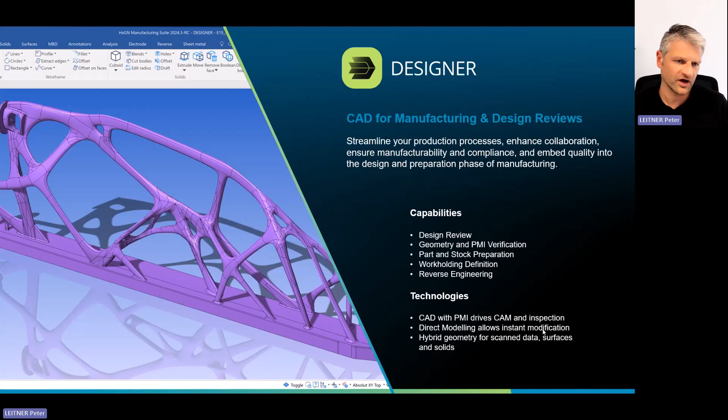And in detail, I want to go into the Hexagon Additive Manufacturing Suite, which consists of 4 software products: Designer, where we want to deep dive today, AM Studio, Simufact Additive, and Esprit Edge. Designer is CAD for manufacturing and design review, so you can make design reviews, you can generate geometries, or you can design in Designer. And parts and stocks can be prepared for workholding definitions, and so on. And the underlying technology is a direct modeler, which allows instant modifying of a certain geometry. I want to go into that in detail later on.

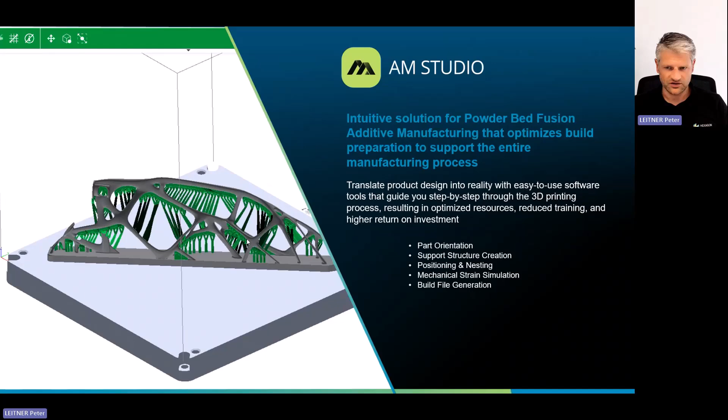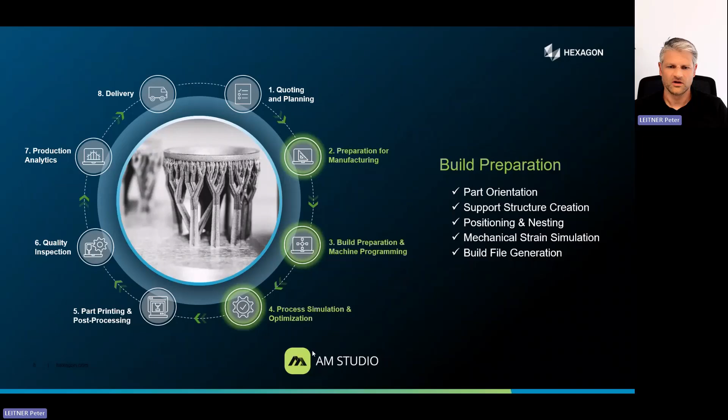If we look at the circle from quote to delivery, Designer is placed at the beginning of the circle or the workflow. It's in quotation and planning, as well as in preparation for manufacturing. Next product is AM Studio, which is more or less the data preparation tool for metal additive manufacturing. In AM Studio, you are able to orientate the part. You can define the support structures, the positioning and nesting of parts. You can run a quick mechanical strain analysis or simulation. And last but not least, you can generate a build file for the 3D printer. AM Studio is in the circle of quote to delivery also at the beginning, from step 2 to step 4. Before the printing of the part, all the steps are done in AM Studio.

The third product in the Additive Manufacturing Suite is Simufact Additive, a powerful and scalable process simulation for first-time right metal additive manufacturing. You have fast meshing capabilities, and you can predict the distortions of the part in an early stage before printing. You can optimize based upon this distortion prediction. Simufact Additive is in the circle again in the data preparation area and in the process simulation and optimization steps.

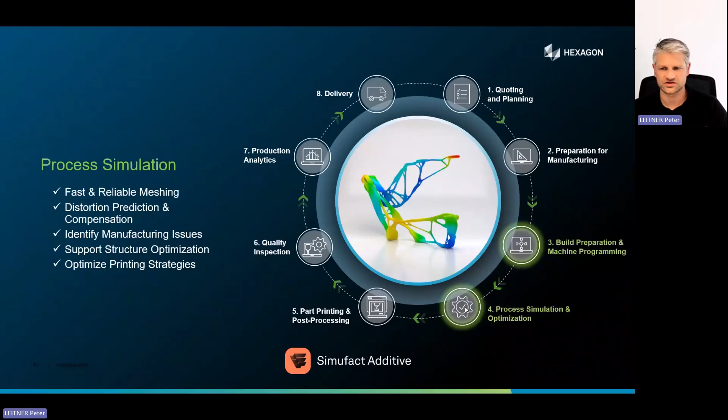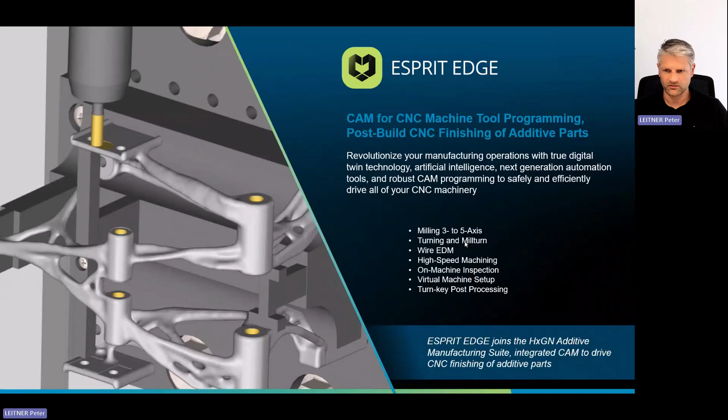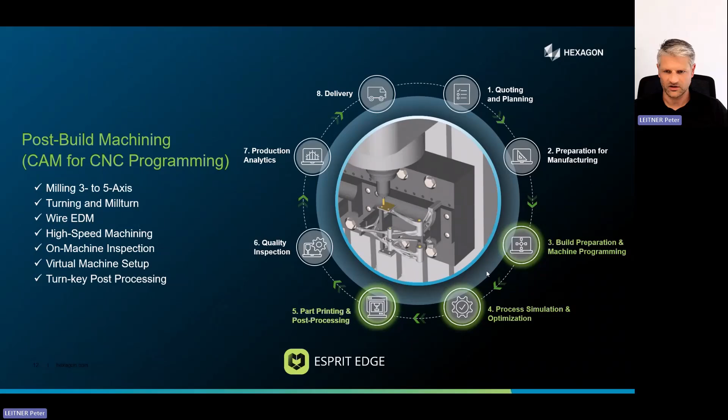And last but not least, we have to post-process nearly every part, or we CNC finish the additive parts in Esprit Edge. It's a CAM software for CNC milling for 3 to 5 axis, turning and mill turn, and a bunch of other functionalities. And Esprit Edge, or the CAM, is found in the printing and post-processing. All these products can interoperate within Nexus, which is a platform to share projects with the different software products, so that automatization and collaboration of all these products is guaranteed.

Okay, so I started Designer. And the default for users is the default theme, where you have all the functionalities available which Designer can offer. And in the next version of Designer, the 2024.4 version, a theme called Additive Theme or AM Studio Theme will be available, where we made a subset of all the functionalities that Designer can offer in its own theme, where you can find the most common functions which are necessary in the additive world.

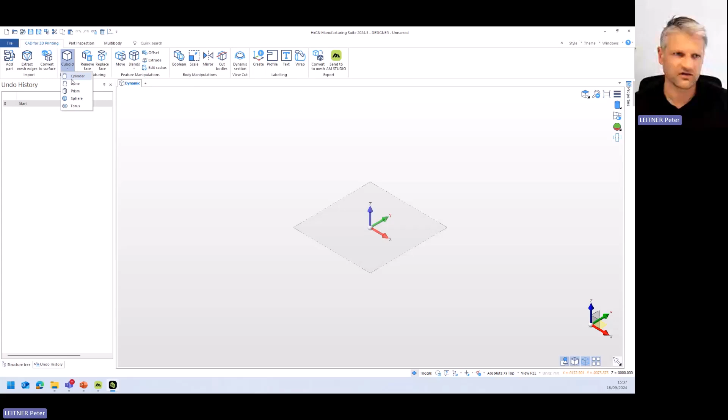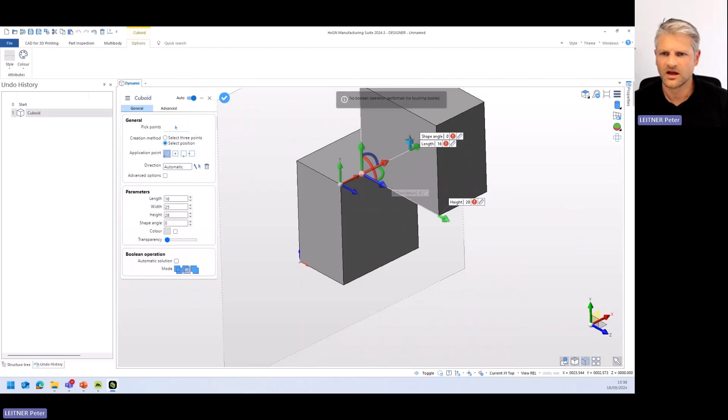Designer, as I mentioned before, is in general a direct modeler. What does direct modeling mean? Direct modeling allows you to quickly shape geometries without worrying about features or constraints. What I mean with that is, for example, I want to design here a simple cube structure, something like that. And what I mean with direct modeling is you can now change the topology of the part pretty easily by simply, oh, that's the wrong one, sorry.

You can change the part pretty easily by simply dragging and dropping some features, and you get a new topology or a new design out of it, but it still remains as one body. It's still the body that is here. It's similar to shaping a dough by pushing and pulling features. And this is what I wanted to mention here.

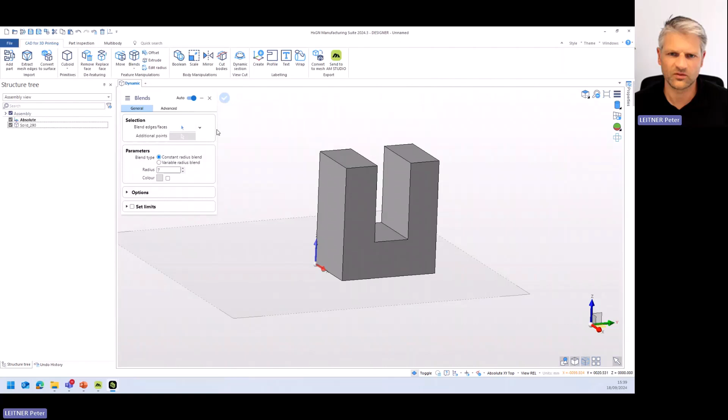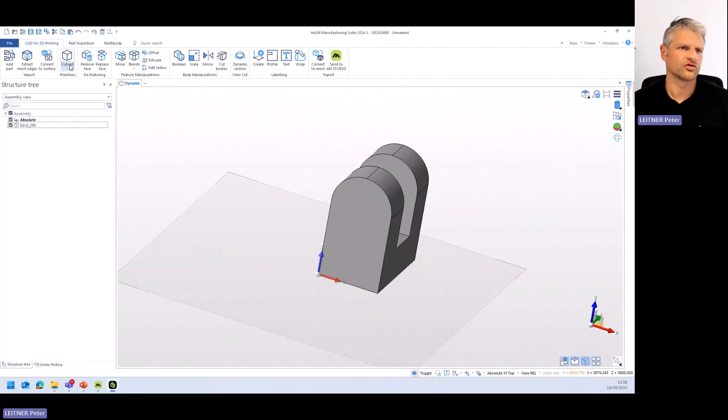So when I add here some blends, for example, onto the part with a certain radius, you can simply change the radius pretty easily. But as you can see, there's no feature listed here on the left-hand side which says that this solid has a certain blend on it. So that's a bit different to a parametric approach of designing a feature.

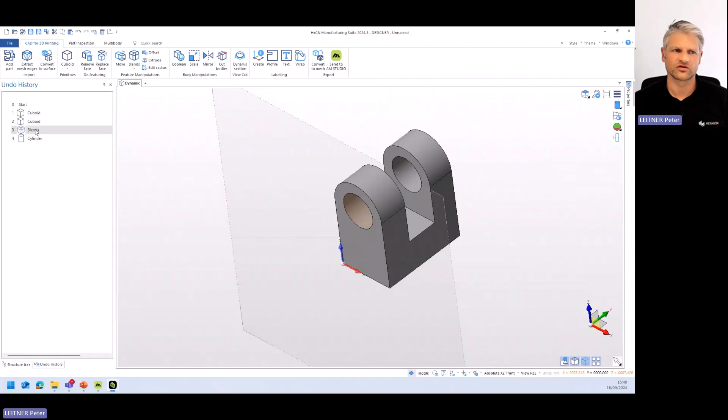So I want to add here a hole, for example, and as you can see, this hole or these blends were not listed in the structure tree anyway. Where you can access the features is in the undo history, which I sometimes like to work with. So you can, for example, edit the radius of these blends pretty easily by accessing the undo history, or you can simply select that feature, right click on it, and then change a certain feature of a part. But it's never listed on the left-hand side. That's what I wanted to point out.

The benefit of that, and why Designer is based on direct modeling, is it's very beneficial to be very flexible and very fast in designing some features, like for the milling, a clamping device or something like that. You need this clamping device once and not a bunch of times, where a parametric CAD would be more beneficial. But for the things that we need, the direct modeler fits perfectly to our needs. Okay, that's what I wanted to point out with the direct modeler.

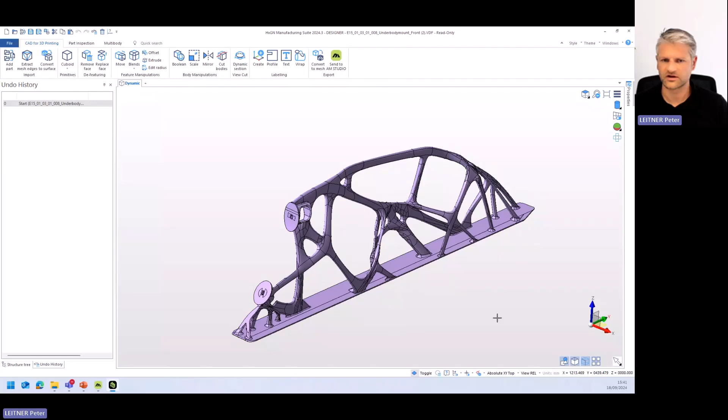And now the standard workflow for additive is the customer, the user, who has to print the part, gets a certain geometry. This geometry is designed by another company or by the design department inside my company. But I have to deal with the design that I get and work with what I have available here. And sometimes you get a topology optimized part like that. It is a STEP file, so a neutral file format for CAD export.

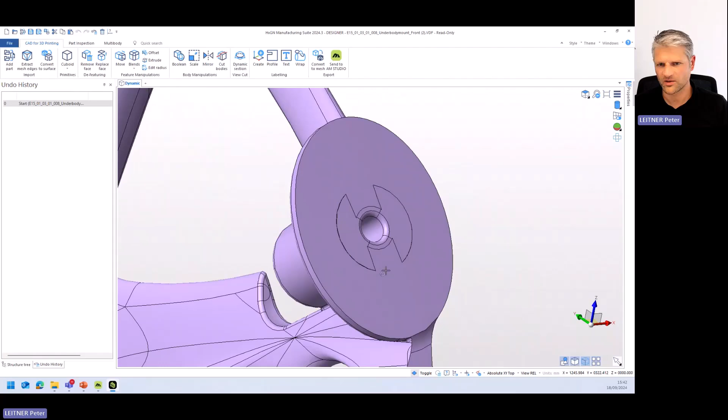And now I wanted to have a look at the features which are available on the part itself. And what immediately comes to my mind is, why is this not only one surface? It looks like it should be one surface. And there I want to point out the defeaturing functionalities in Designer. The first thing I want to show is the replace faces feature. So I can select the faces that I want to replace. There's a small face here in the inner, as well as here. And the destination surface should be this one.

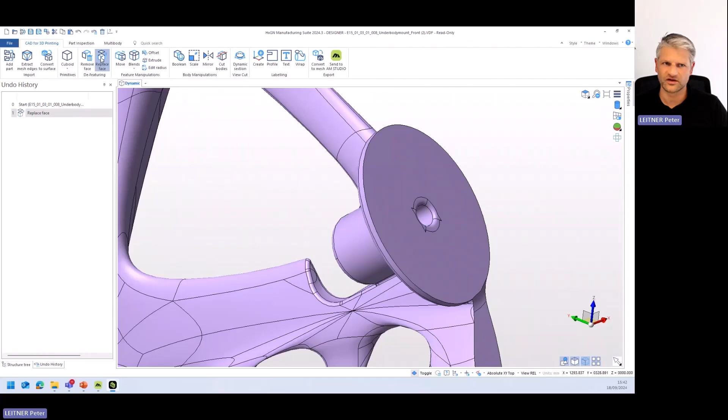And now I got rid of a bunch of the surfaces which I was not comfortable with, but this blend, as it is visualized here, I'm also not very happy with. So I also want to replace these blends here on that side, and I think they're on the opposite side as well. I want to replace them with the hole so that I get rid of these blends pretty easily.

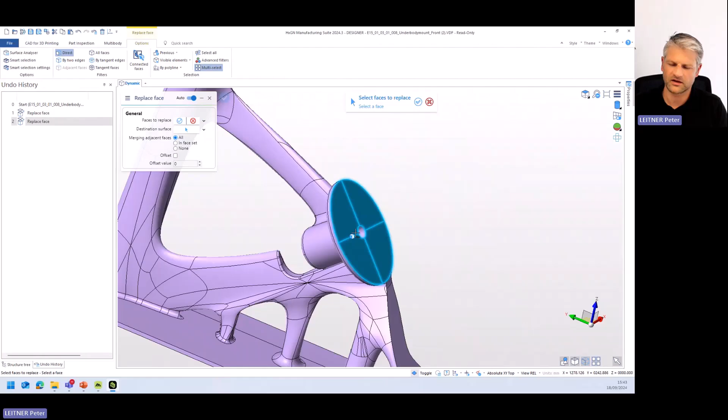The reason why I wanted to do that is later on, this surface should be offset or milled by a post-milling procedure, because it should not be a rough surface. It should be a very smooth surface, because there is something mounted onto that part later on.

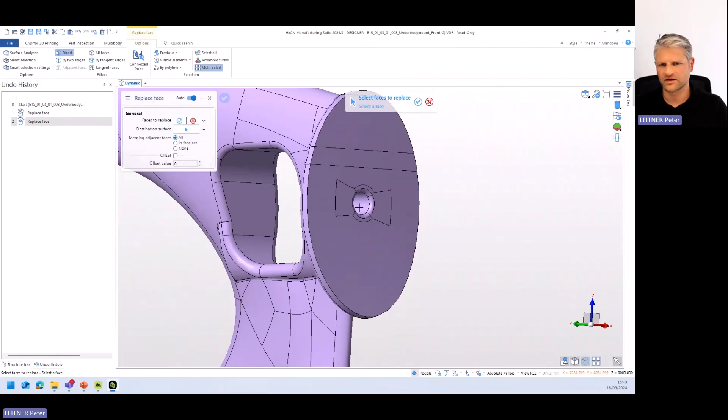The next surface which comes to my mind is this one. Again, there are these faces which I don't know where they are coming from, but I wanted to get rid of them. And I'm using the replace functionality of Designer to get rid of these surfaces. And I want to replace it with that bigger surface here.

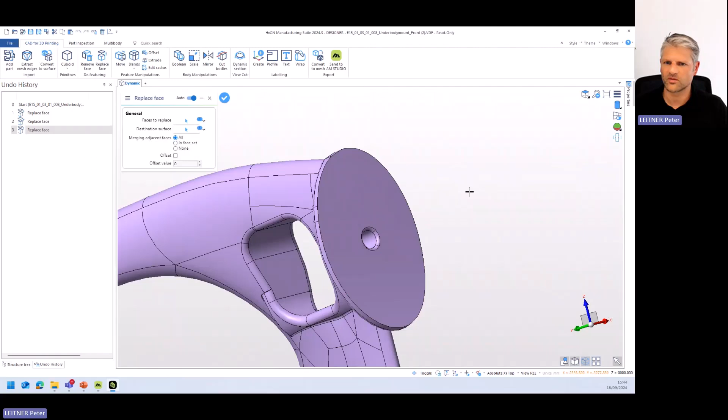And as can be seen, this surface is not fully flat. It's a bit shaped. And that's probably the reason why these smaller surfaces are also subdivided from the bigger surface. And again, I want to replace them by one surface, which now is the case. I have one surface which I can work with much more beneficially than with these sub-surfaces.

Again, I want to get rid of the blends here, and on the opposite side as well.

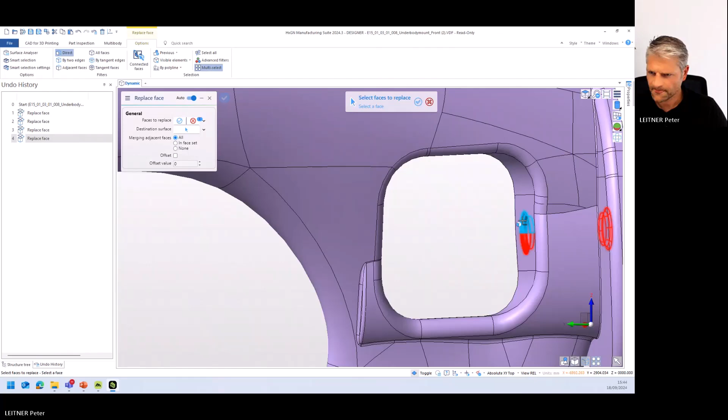Yeah, sorry for that. Okay, so now we have these single surfaces where we can later on work with that. And here on the bottom, there are also some features which I don't know where they are coming from, and I don't think they are necessary for that part. Here's a hole which I don't know if this is necessary for printing. I want to get rid of this one.

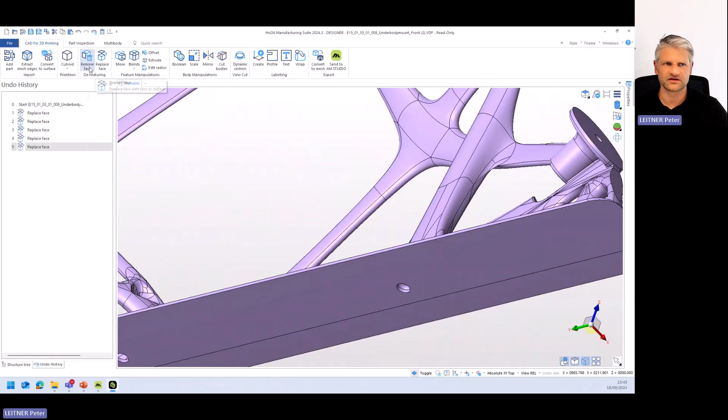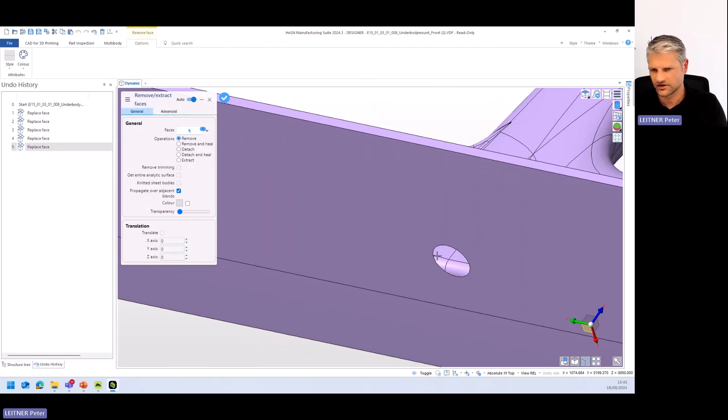In this case, I want to use another functionality in the defeaturing area. It's called remove faces. And again, I'm simply selecting the faces that should be removed, and I activate the remove and heal. So if I only use the remove, then these surfaces will be removed, but there's a hole in the mesh or in the solid, which should not be in there. So I can use the remove and heal functionality. So it's trying to close the surface again, so that we can work with the surface.

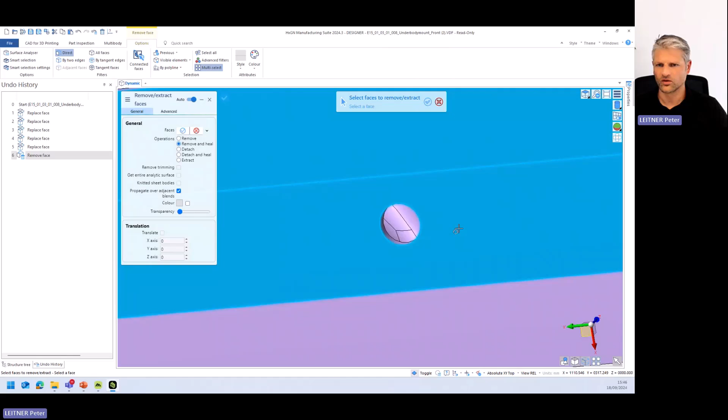As well, this hole is a very small hole, which is here available, and I also want to remove that one. And there is a surface. I don't know what's the reason for that, but as well, I want to get rid of that. And then we have this bottom surface here, which I think should also be one big surface. And there I want to use, again, the function of replace.

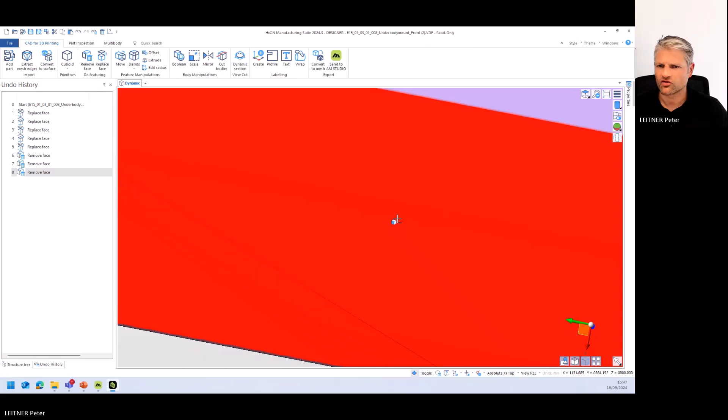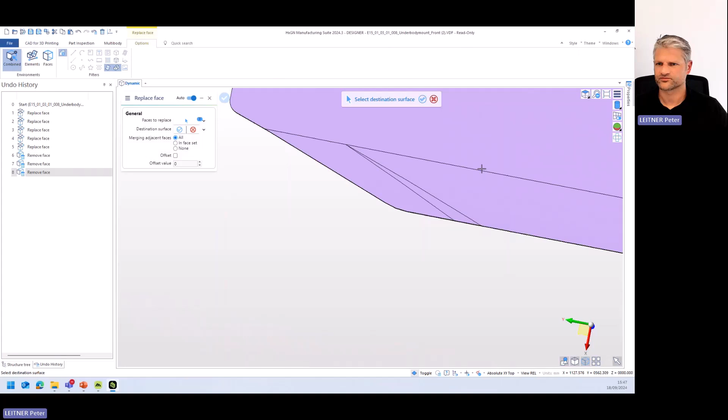You can access the functions as well by right-clicking on the surface which is selected. And there you can find favorite functions, which I mainly use. You can add here new functions which you oftentimes use, but I want to use as well the replace faces, replace it by that one. And I end up again with this single surface in comparison to the split surfaces before.

So now we have these holes here. I'm not sure if I want to print them, but we can select these holes and right click. When we have selected the holes, we can easily change the diameter or the radius of these holes, so we can increase it pretty easily, or we can decrease it as well.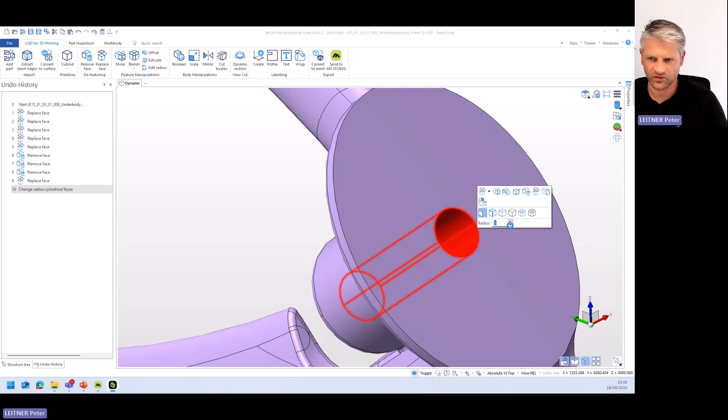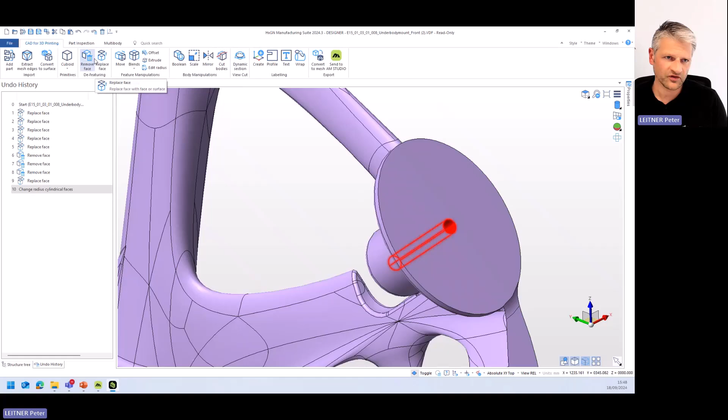But to be honest, it's a hole with 1.5 millimeters in radius, so 3 millimeters in diameter, and I think it is more efficient to drill it with a tool later on the milling machine. So I want to get rid of these holes as well by simply removing the faces, and I also want to remove that one, so that these holes are also no longer part of the part.

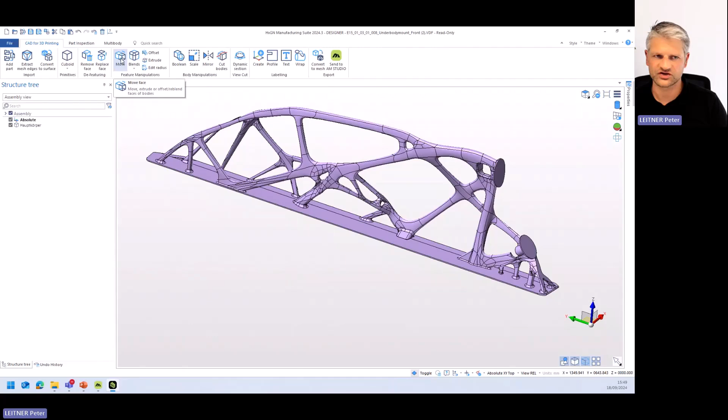So now we have defeatured our part so that we are comfortable to now do some adaptations onto the part. And one of the most common adaptations which is necessary for additive is to add an offset to a certain milling surface, like these 3 surfaces we worked on now. And you have two functions available: move or offset.

With the move functionality, you can simply select a surface, elements to move, right click so that it's selected, and we can now offset this surface by easily changing the number here, the distance, to for example 2 millimeters. And what you can see, move takes into account the neighboring surfaces.

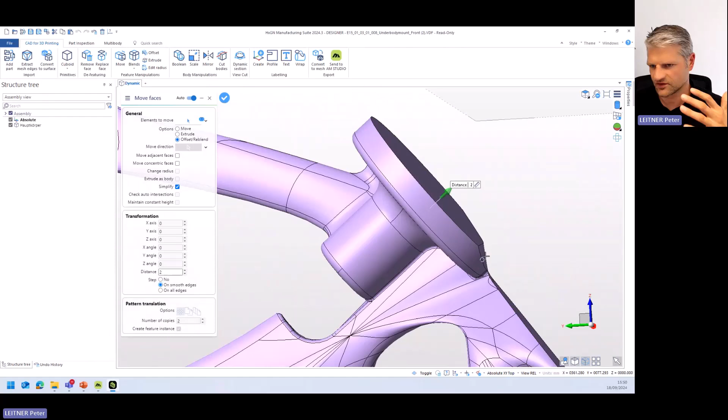So as you can see here, the shape which is coming inside the surface I'm working on is taken into account within the moving. If I don't want to take these neighboring surfaces into account, I would use another function. It's the offset functionality, where again I have to select faces here because I want to offset a face.

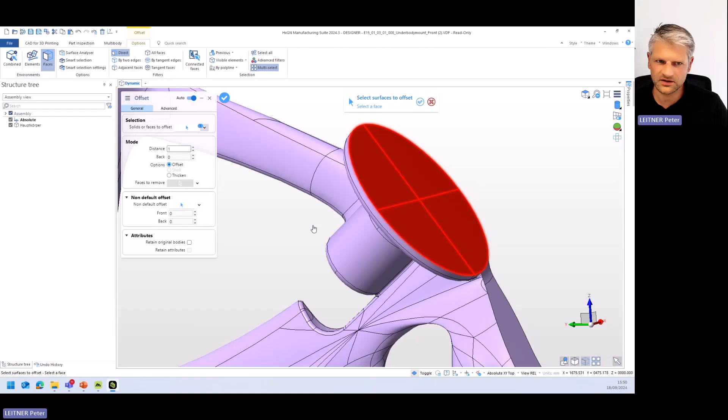What's also the case for the offsetting or for the thickening is you can see now in the structure tree that we have additional parts or additional solids here available. If I don't want to have 3 individual bodies, you can simply merge them or Boolean them by using the Boolean functionality. I have the target body, which is the main structure, and I add these 2 thickened bodies. And now I ended up again in one single part, which I can work on.

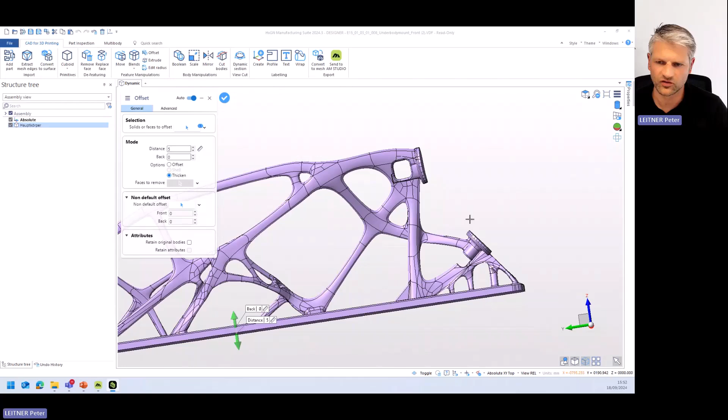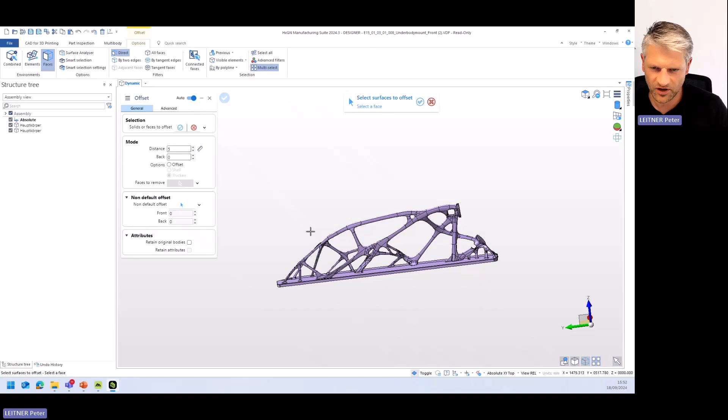Last but not least, I want to offset this bottom surface as well with an offset. And again, I want to use the thickening functionality. But in this case, the offset should be more than the 2 millimeters because the part, as it is, will be printed on that surface. And I will later on cut off the part from the base plate, and a certain thickness is necessary to guarantee that the wire cutting is not removing material from my part. I want to increase the thickening distance.

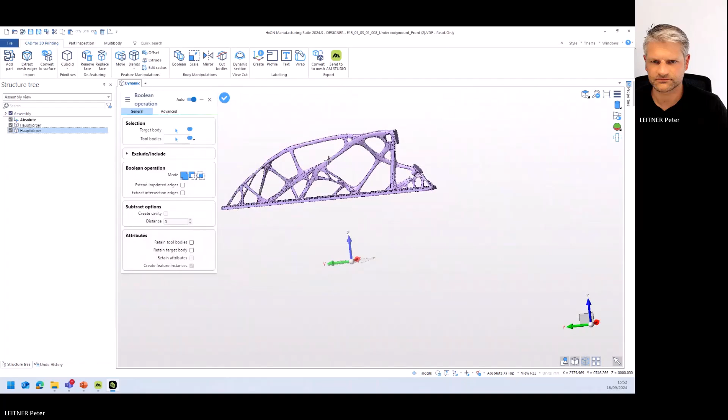Okay, again, I have now 2 bodies, the main body and the thickened body. I will do another Boolean on that part. And now I have the part which I want to later on work in AM Studio, for example.

What I also wanted to show you here is you can do a cutting through the part, so you can visualize how the inner of a certain structure is looking like. You can change the cutting angle or the cutting direction, and you can slide through it. Yeah, I think this is a standard feature, which is necessary to get a feeling of a certain part.

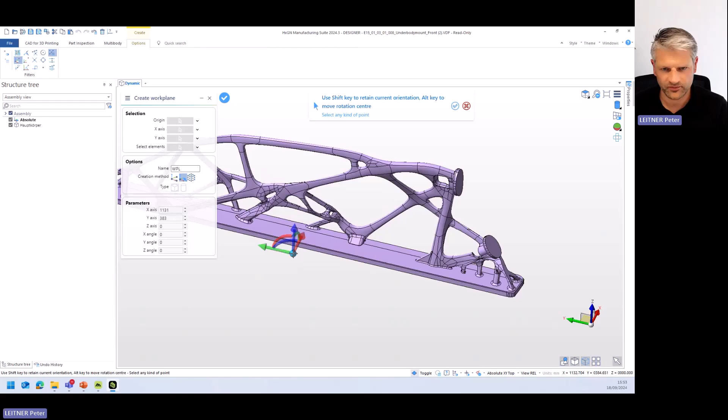What I also wanted to show you is labeling functionalities inside Designer. And at first, I want to show you how to imprint a certain logo. To do that, I add a new work plane where this logo should be located. So for example, I want to add this logo on that surface here. So I added a new working plane here, and I import the logo as a DXF file. This is necessary. The logo has to be converted into a DXF file so that we can work in Designer with it.

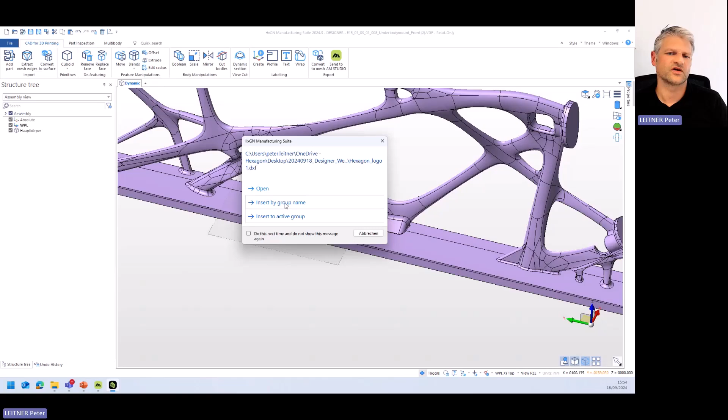When we simply import this logo, then you can see that it's rotated in the wrong direction. So I have to rotate the logo first. So now it looks better. And the application point is exactly the origin of the work plane that I have added before. So now I have imported this DXF file, and as you can see, this DXF file is single lines. So this is something we can't work with to imprint it. So I have to make a profile out of these single lines.

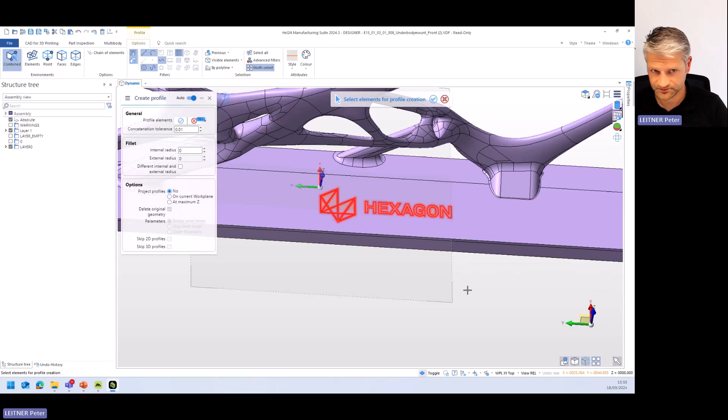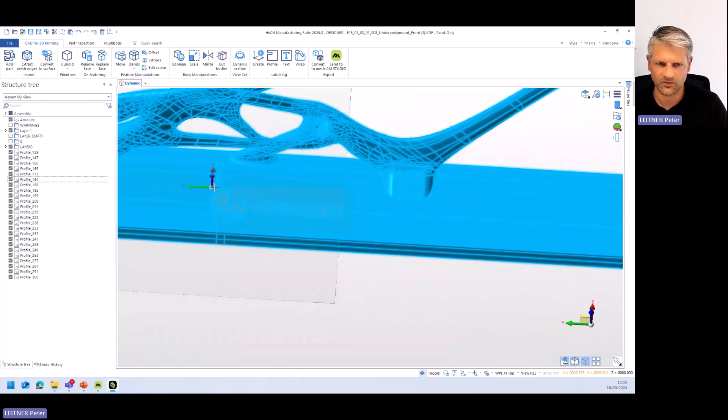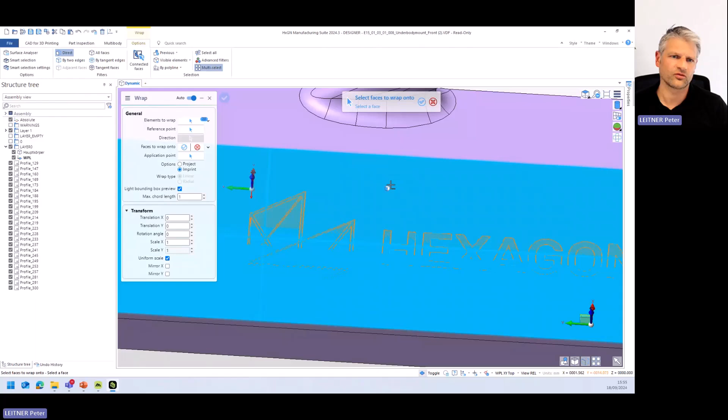And what's meant by making profiles out of it: these single lines are now converted to a certain field, let's call it that way. Those are more or less the individual letters, so that we can now take these profiles and wrap them onto the surface where I want to imprint it. So I have to first select the elements to wrap. Those are more or less the profiles. Then I have to select a reference point, the surface where it should be wrapped on, and application point. Exactly.

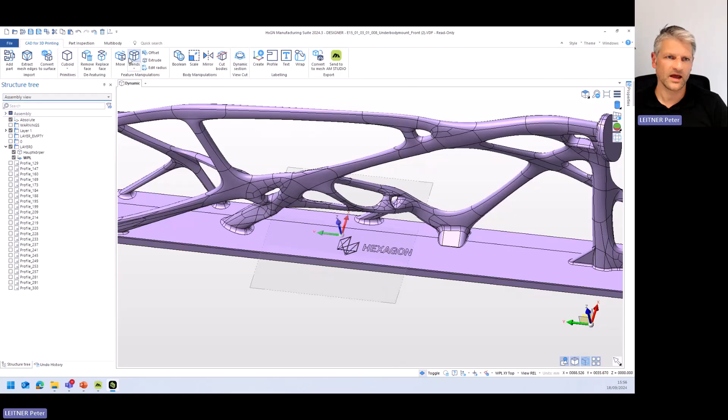So now we can see the profile is now imprinted onto the mesh, and by changing the view in the structure tree to group by colors, I can simply deactivate the profiles pretty easily. And there we can see that's now wrapped onto the flat surface where I want to imprint it later on. And to imprint the profiles that I have now chosen, I can simply use again the move functionality of Designer. I have to deselect the areas which should not be embossed or imprinted.

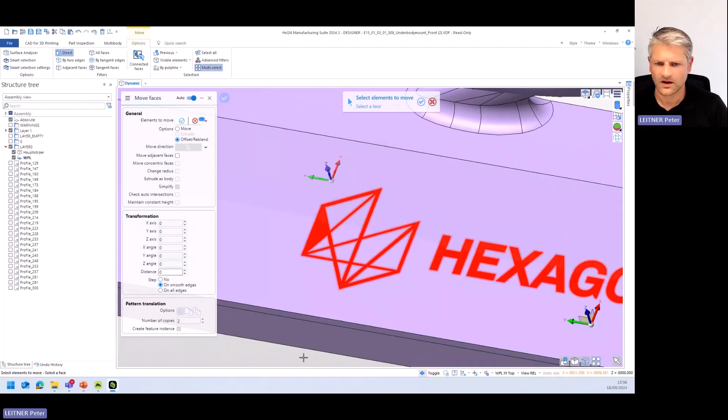Oh, take this one. Okay. And I have to define a certain distance. And now we can see I can expose this logo, or I can emboss the logo. That's now up to you. If you are more comfortable with the expose or emboss, I more like the emboss, because then the surface stays flat, and only the logo is imprinted.

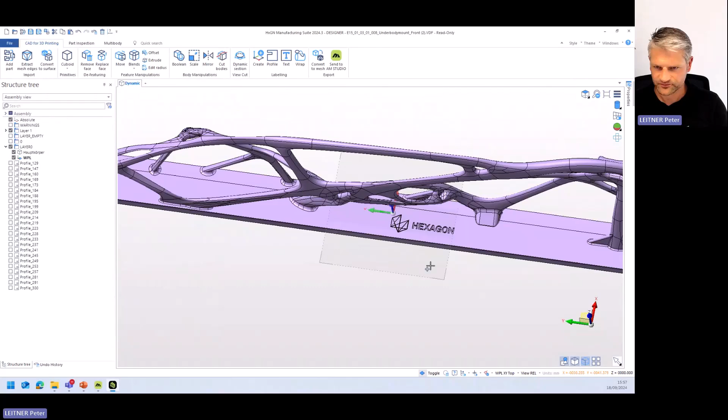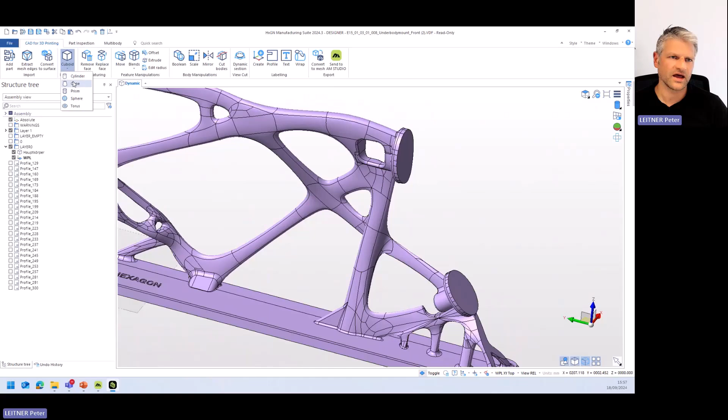Yeah. Now we have imprinted the logo onto the surface, and what we can also do inside Designer is add certain structures where I think it can be problematic later on in the printing. So, for example, I want to add a cylindrical structure to, for example, this point here.

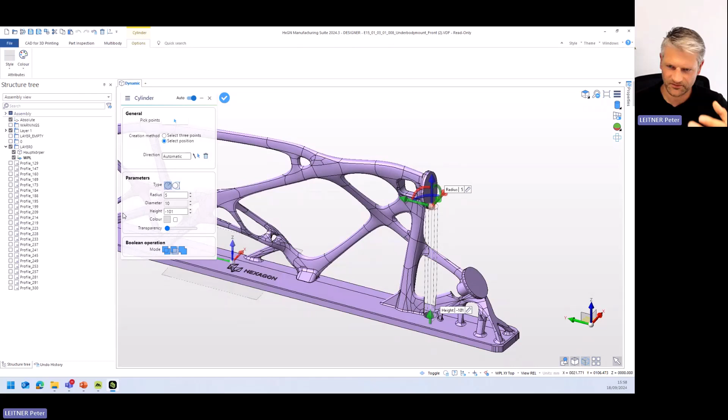Give it more stability, and as you can see, I have now subtracted this additional structure, and you can add this structure as well. And I want to decrease the diameter, for example, to 2 millimeter diameter. And now we have this rod structure added to the structure itself as well.

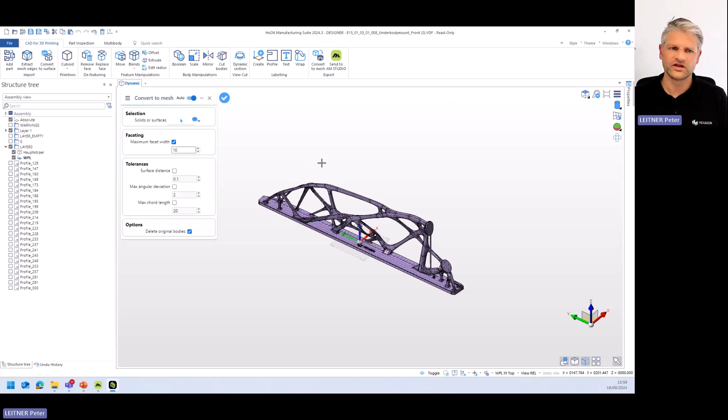Last but not least, to get the part later on in AM Studio. AM Studio is working on a mesh base, so you always have to generate meshes out of the CAD surfaces. You can use the functionality of convert to mesh. I like to convert the mesh on my own, because then I can tweak all the different parameters here. So I can, for example, change the size of the individual triangle meshes pretty easy by simply increasing or decreasing this value here.

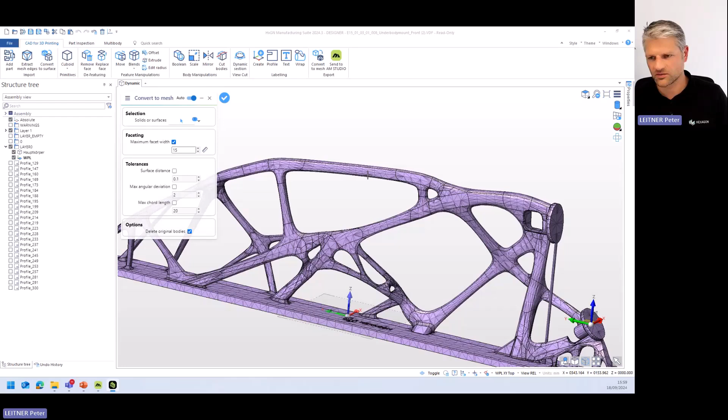It's the maximum facet width. So I can make it bigger or smaller. I have deactivated the deviations. So there are also possibilities to work with the accuracy of the mesh.

So this part is finished. I can send it to AM Studio. This is more or less an export step. So I can export the STL file to a certain directory. Clicking on save will now store the file in a certain directory.

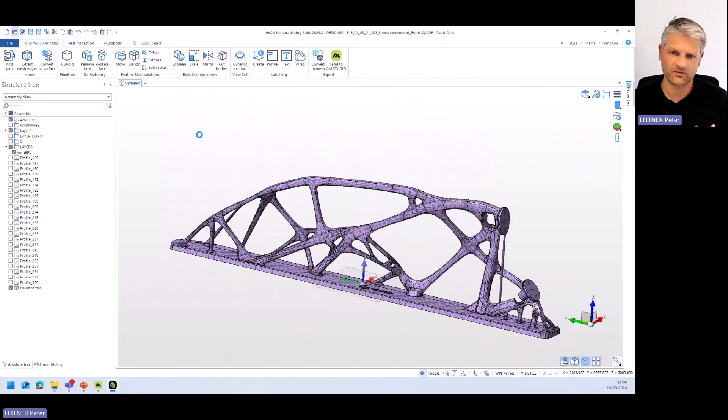And as I mentioned before, in AM Studio, we have to work with mesh structures. And that's very common in general in the additive field, to work with meshes in comparison to native CAD files or step files or something like that. So in short, I also wanted to showcase how you can work in Designer with the mesh model. So I imported a pretty easy part, to be honest. If it's the best part to print, it's another discussion, but yeah.

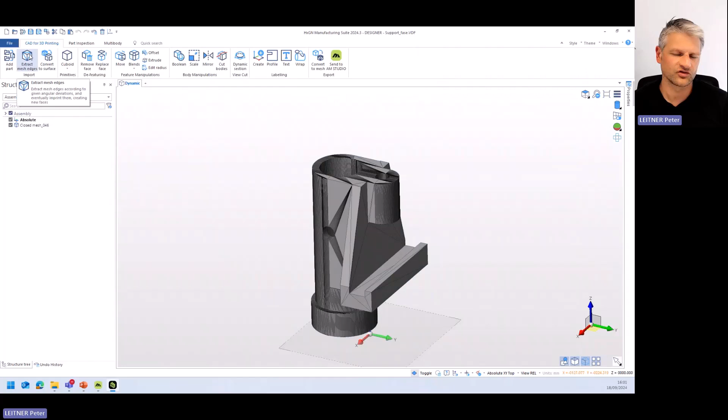I imported an STL file, and as you can see, it's one closed mesh. So I can't select any surface here. So first thing I have to do when I work with meshes is to extract the mesh edges. Simply selecting it highlights the edges which are detected, and you can very easily again play around with the accuracy. As you can see, beforehand there was this edge detected, and by simply changing this parameter here, you can get more edges out of the part.

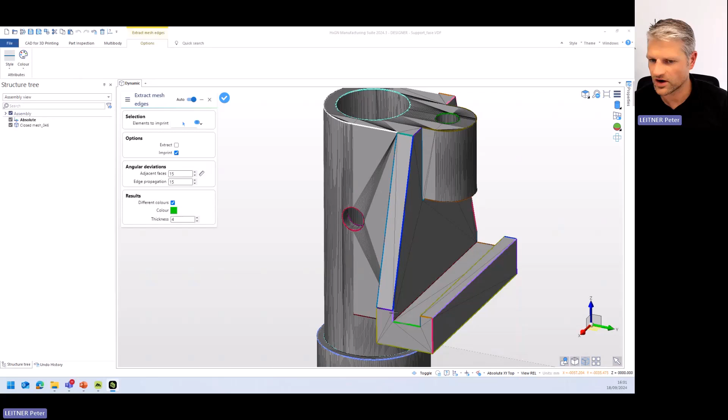Now I've assigned that, and as you can see now, I can select all the separated faces, but it's still one closed mesh. It's only the possibility of working with the individual sub areas, more or less. And what I wanted to showcase here is, I can now take this hole here, and I can, for example, make an offset onto that.

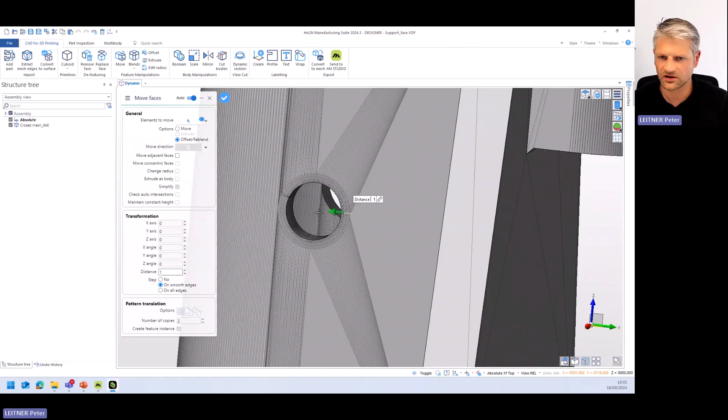As you can see, it's now remeshed and it's offset into the inner 1 millimeter, or for example 2 millimeters to the inner. Or what I can also do is I can move the hole in X, Y, Z direction. So for example, I want to move it 1 millimeter to the left and 1 millimeter in Z for whatever reason. So you can, again, very efficiently, from my point of view, work with the mesh as you have worked with the CAD surfaces.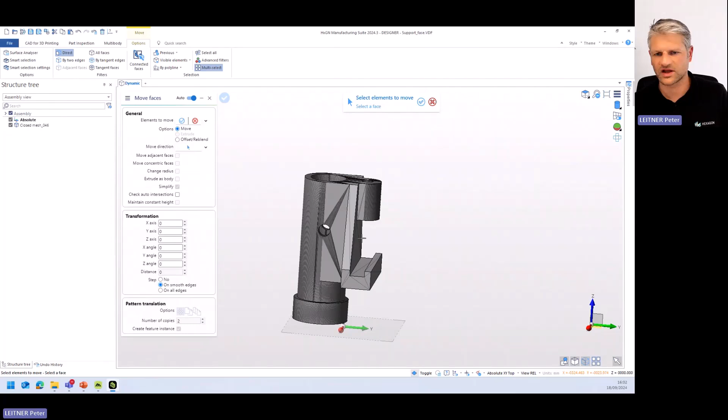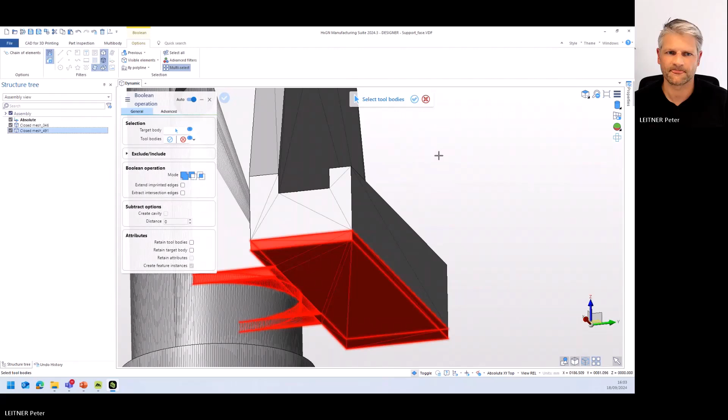Again, for example, we want to offset this surface because for whatever reason, this should be viewed later on. And I want to offset it with 2 millimeters, and I want to thicken it. As you can see now, we have thickened this area to the downward direction of the part. And same as working with the native CAD surface or NURBS surface, we have now two closed meshes available, the general part and the offset part. And we can Boolean those together to get one single solid out of it.

Sorry, there's something not working. And I have to take this one and this one.

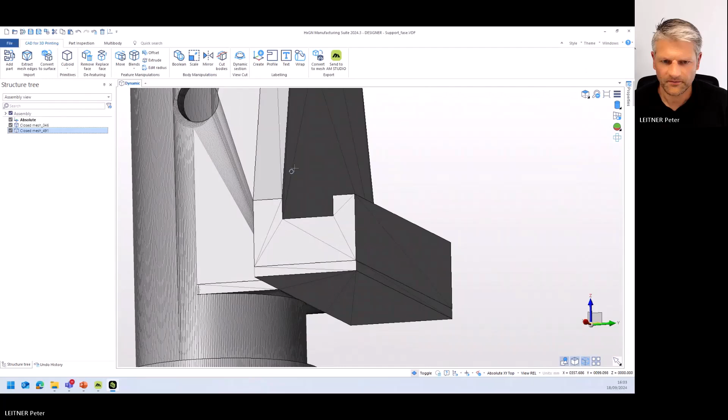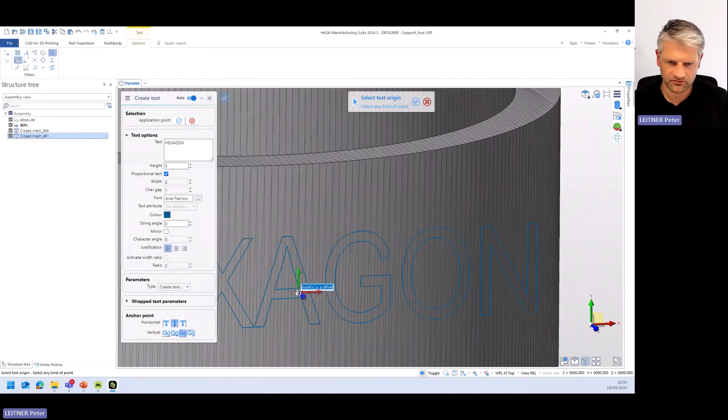One other thing that I want to show you is you can also label STLs or mesh files. It's nearly the same procedure as we had before, so I have to add a work plane or an application point where I want to add the text or the logo. I want to now add here a certain text. In this case, it's Hexagon, more or less. You can change the font, you can change the size and all of that.

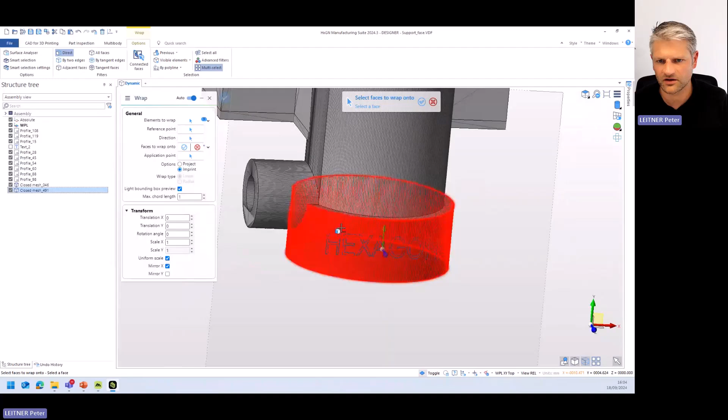And now we have the profile here available, but as you can see, it's not wrapped onto the curved surface. So we again have to use the wrap functionality of Designer. So that's the profiles. The reference point should be this one. And the direction should be in the Z direction. The surface where I want to apply it on is this curved surface here. And the application point is again this one.

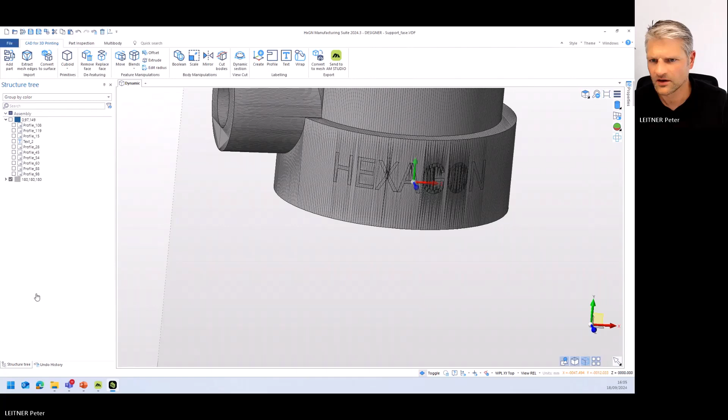This one. And you can immediately see that the mesh has been changed in the background. Again, I want to deselect the profiles so that they are no longer visible. So again, we have imprinted now the logo, or the letters, onto the surface. And now I can again move these into, for example, the positive direction. And I end up with the Hexagon logo or the Hexagon text on the surface. Okay.

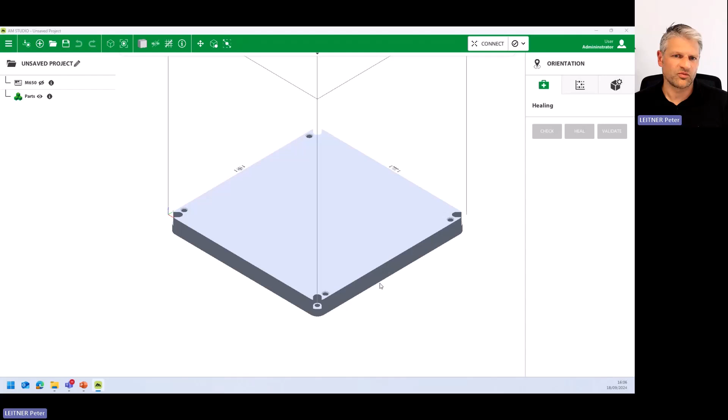Last but not least, now we have generated the STL file of the geometry, and I started AM Studio. I can now load that part. It's this one that we have prepared beforehand in Designer. So there is the STL file. You can see this rod structure that we added here, and you can see the imprinted logo of Hexagon. I want to use 0 distance to the base plate because the part has an offset on the bottom so that we can directly print on the base plate.

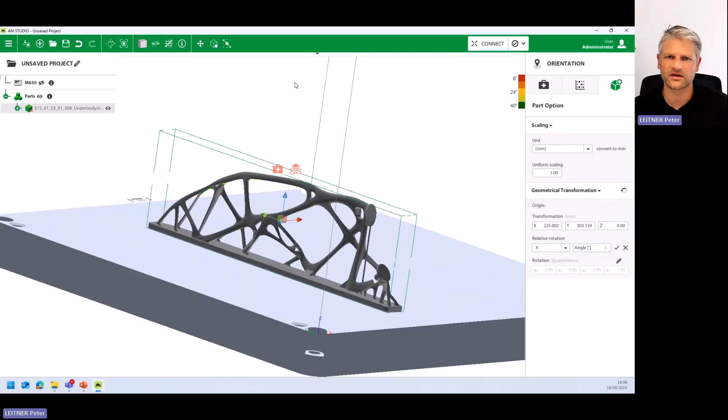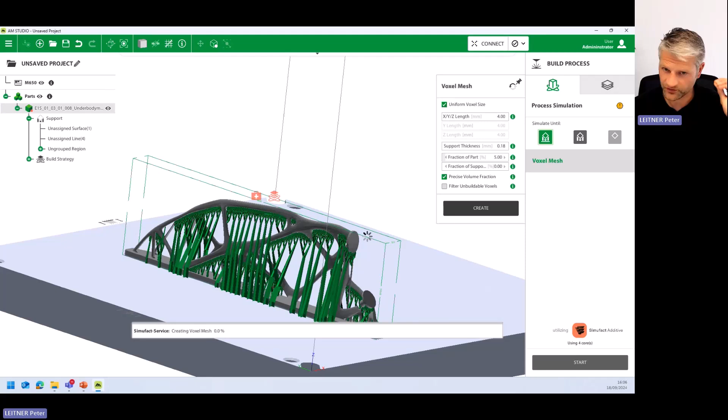Next step in AM Studio is to calculate the support regions and to add support structures. In this case, I want to use this tree-like structure here for that part. I would be able now to nest the part. I want to skip this, and I can run a very rough estimation of the deviation of the part, so how it will deform during the print process. First, I have to mesh it, so we are generating a voxel mesh out of it, and we are using in AM Studio the functionalities of Simufact Additive.

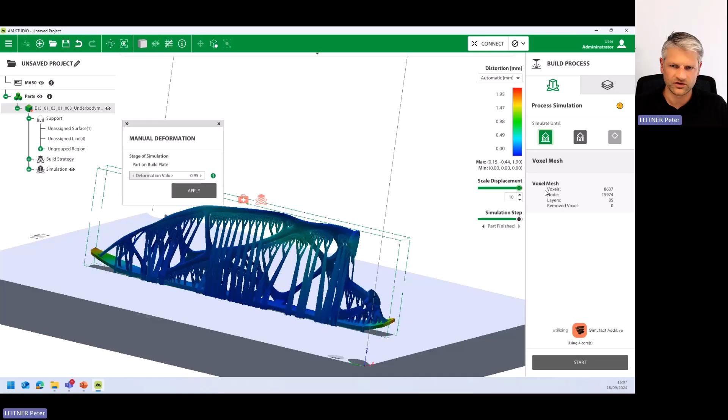We can also store the project in Nexus, and in Simufact Additive we can consume the project so that we can run a very accurate simulation as well. So the embedded simulation capabilities in AM Studio show how the part will deform during the printing. Yeah, exactly. If I'm happy with that, the last step for the data preparation is to assign a certain slice and hatch parameter and run that.

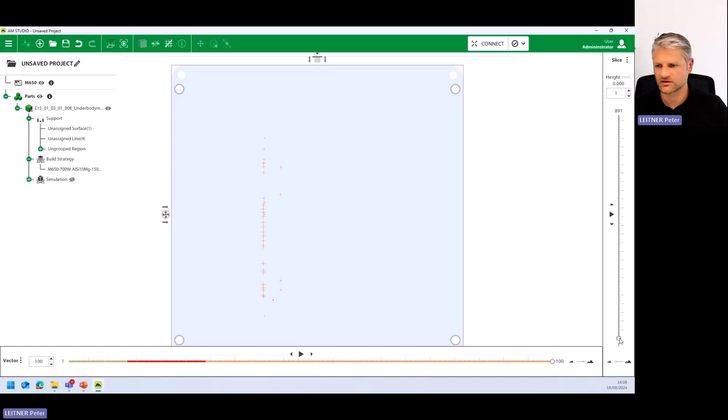So now the slicing and hatching is started in the background, and we will end up with a machine file which we then can run on the printer. So we can see each and every vector, how it will be scanned or exposed on the machine itself. Okay, that's it from the workflow side. So back to the presentation.

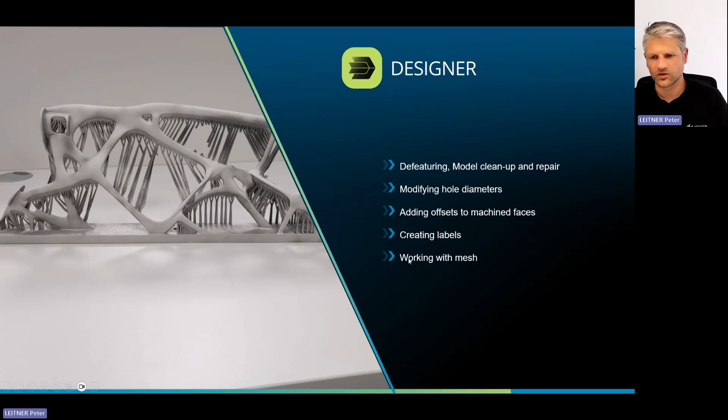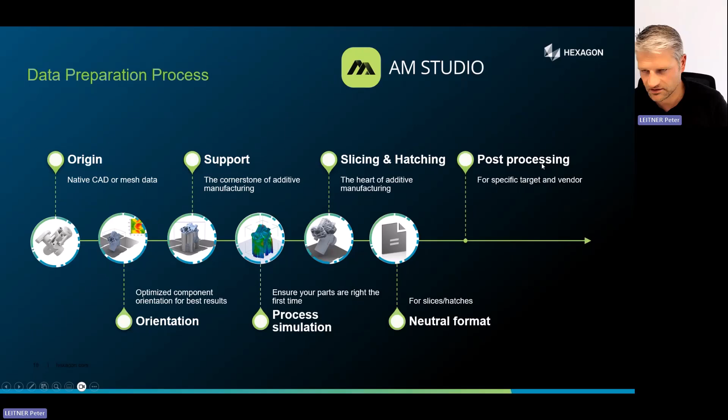I have shown you in Designer how you can defeature a certain part, how you can clean up a part, modify the diameters, and how you can offset certain features, milling surfaces and stuff like that. Very easy and very quick in Designer. You can create or add labels, and you can directly work with meshes as well as with native CAD files. In AM Studio, I have shown you a very quick overview of the workflow. Orientation was not necessary for that part. Support generation, running a quick process simulation, slicing and hatching, and the generation of the machine file itself.

Once again, Designer, AM Studio, Simufact Additive, and ESPRIT EDGE are part of the Additive Manufacturing suite from Hexagon. And yeah, that's more or less it.